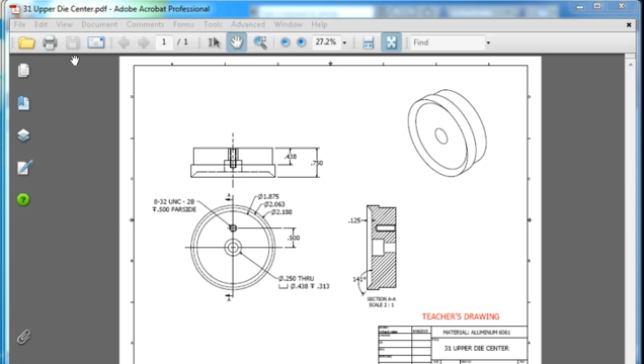In this video, I'm going to show you how to create this part. It's part of the Button Maker project. It's 31 upper die center.

Start out by logging on to Autodesk 360. Select right here and then sign in if you're not already signed in. You're going to set your project. Once you're signed in to Autodesk 360, you're going to select project, and look for your Button Maker project on the cloud. Mine is called Button Maker 360. You select that, make sure there's a check next to it, and hit done.

We'll start out by creating a new part and a new sketch on the XY plane.

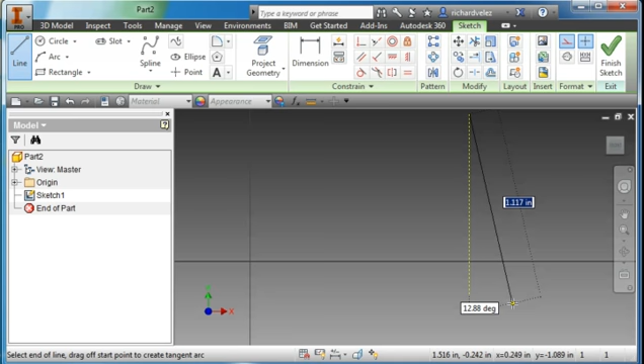I'm going to do things a little bit differently this time. I'm going to start out by creating a series of construction geometry. Select construction. I'm going to draw a series of lines, 2 vertical lines. Make sure they are vertical. And 3 horizontal lines.

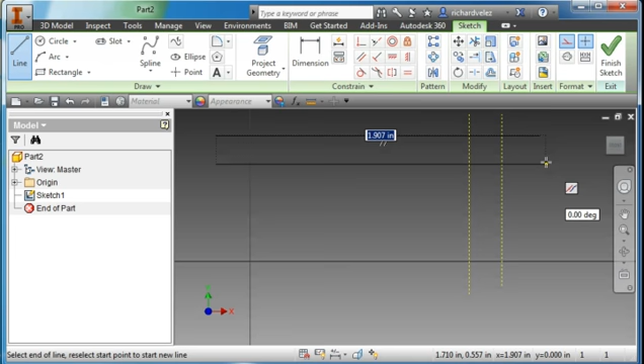In addition, I'm going to project the X and the Y axis. I'm going to dimension to the origin, but I can't do it. You can't dimension to these black lines. You actually have to lay down some axis. So, still in construction mode, I'm going to project the Y axis, and I'm projecting the X axis.

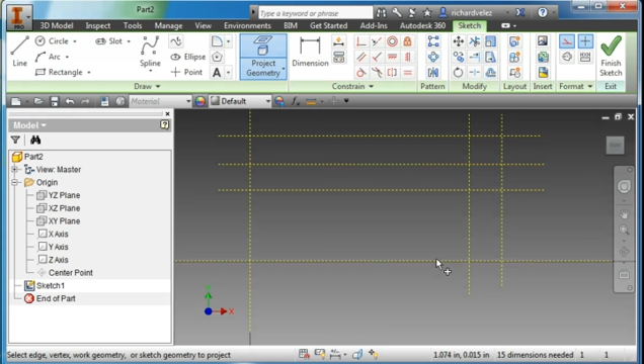I'm going to add some dimensions. Let's start out by dimensioning this line here. And I'm going to make that, that's the outer dimension, the radius. And I want to make that 2.188 divided by 2.

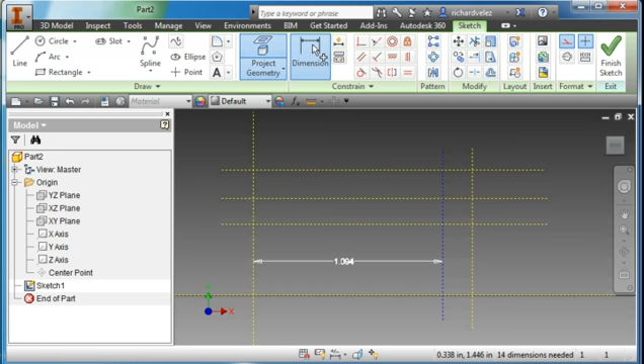Add a second dimension, and I'm going to make that 2.063 divided by 2.

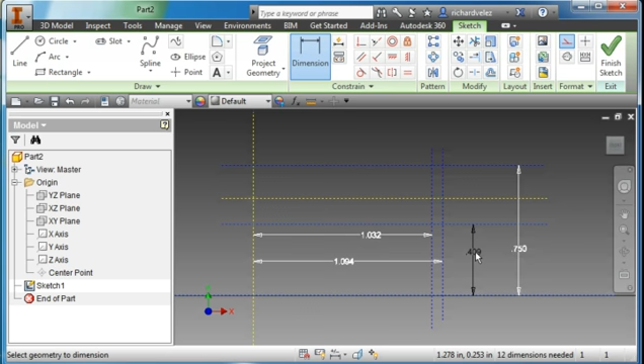Dimension the thickness of the part, and that's 0.75. This dimension is 0.438. And the dimension from here to here is 0.125.

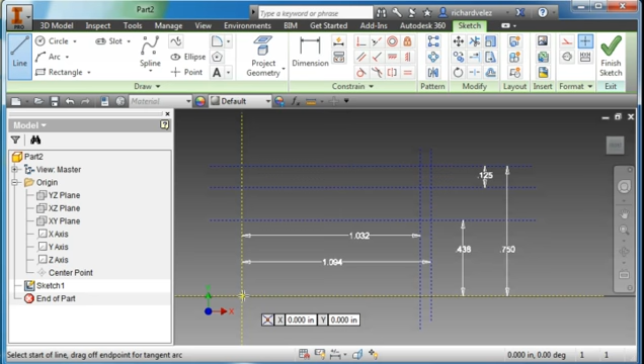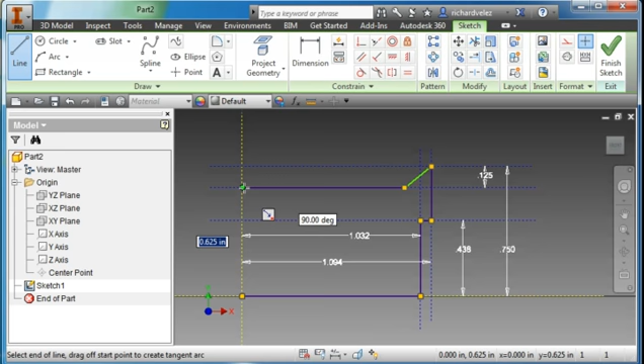I'm going to draw a series of lines and start out. I'm going to make sure I turn construction off. This is going to be real geometry. So I'm starting at the origin and going out to this point here, the intersection of these two construction lines, from here to here, from here to here, here to here, and from here. Now here I'm going to tab over to the angle, and this angle is 14 degrees. Tab, and then I'm going to bring it down to this line here. Extend the line back to the origin, and then from the origin back up to that line. And I'm done. Hit the green check.

I'm going to revolve the part, and for my axis I'm going to choose this line here, this line here. Hit OK.

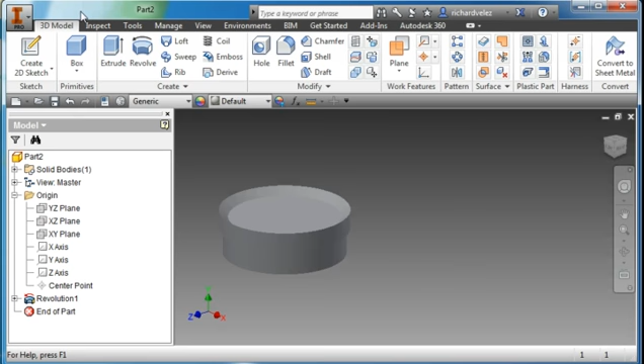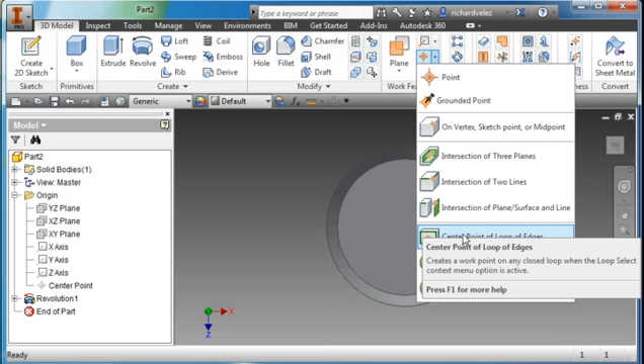I'm going to turn on, go to View, and turn on Shaded with Edges. I'm going to go back to 3D modeling. I'm going to put down a point, a 3D point, and make it at a center point of a loop of edges. I'm going to select this loop here. I'm going to go to my hole tool.

This is a countersunk hole. It goes through all. The through hole is 0.25. The depth of the countersink is 0.313. And the diameter of the countersink is 0.438. Hit OK.

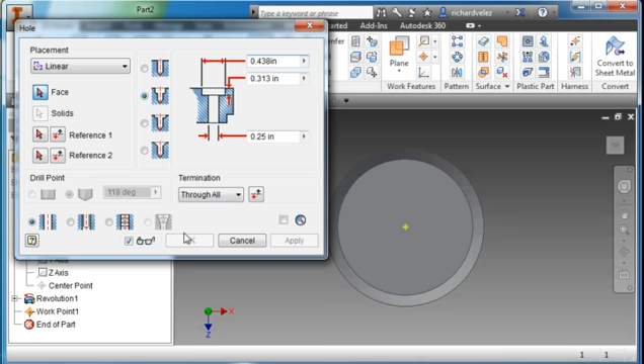Forgot to point to the hole. There you go.

I'm going to rotate the part around. That's my bottom view. I'm going to create a sketch on the bottom. I'm going to rotate this back around. It turned itself upside down.

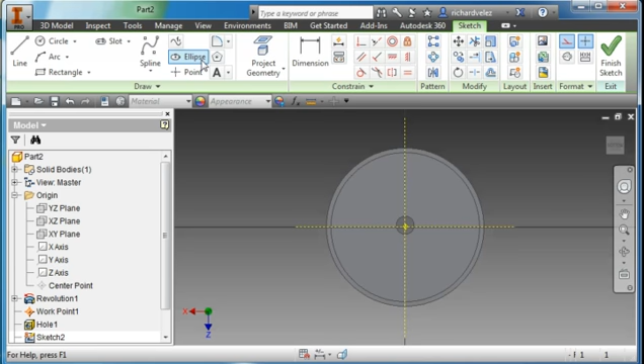So I'm going to go back to construction geometry, and I'm going to project on here the x-axis and the z-axis. I'm going to put down a point up there. I'm going to add a dimension from here to the point. It's 0.5. Hit finish.

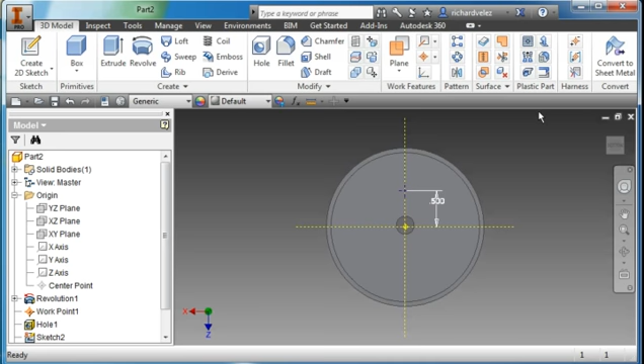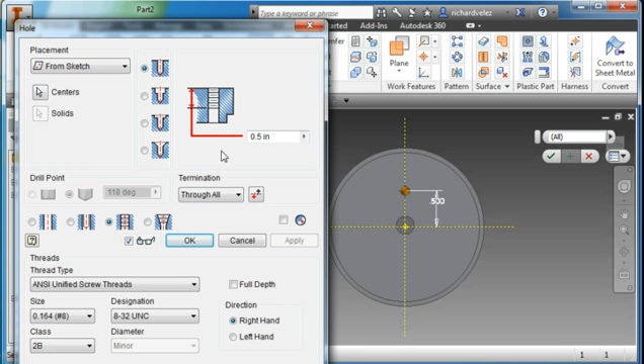I'm going to go to the hole tool, and this is a threaded hole, and the thread size is a number 8 hole, 8-32 UNC 2B, and the depth of the thread is 0.5. The depth of the hole I'm going to make 0.55, and hit OK.

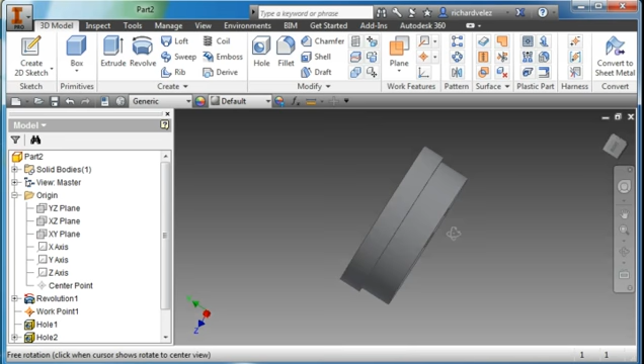I'm going to specify the material of the part. I'm going to right click on the icon here, go to iProperties, choose Physical, and under Material I'm going to specify aluminum 6061. Hit OK.

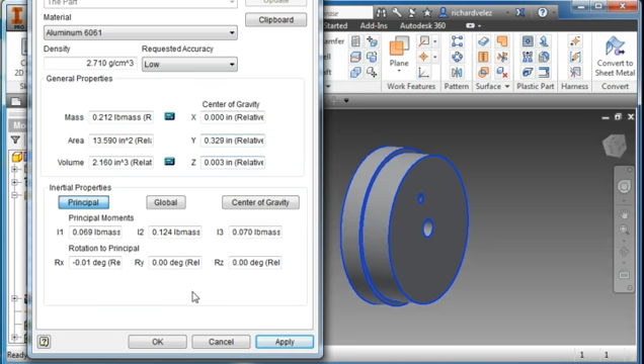I'm going to save the part with the file name 31 Upper Die Center. And if you're done for the day, you're going to want to sign out of Autodesk 360, here.